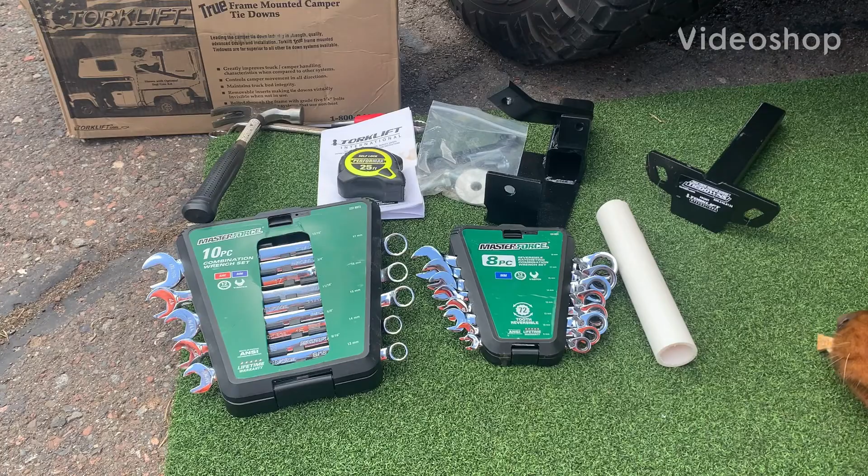All right, everyone. Today we are going to show you how to install front Torklift tie downs for a Toyota Tundra. I'm going to walk you through it step by step and do the best to show you exactly what needs to be done.

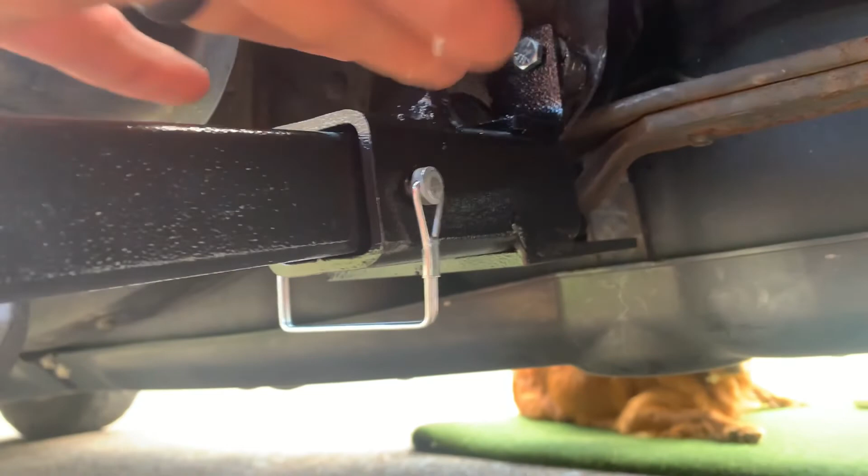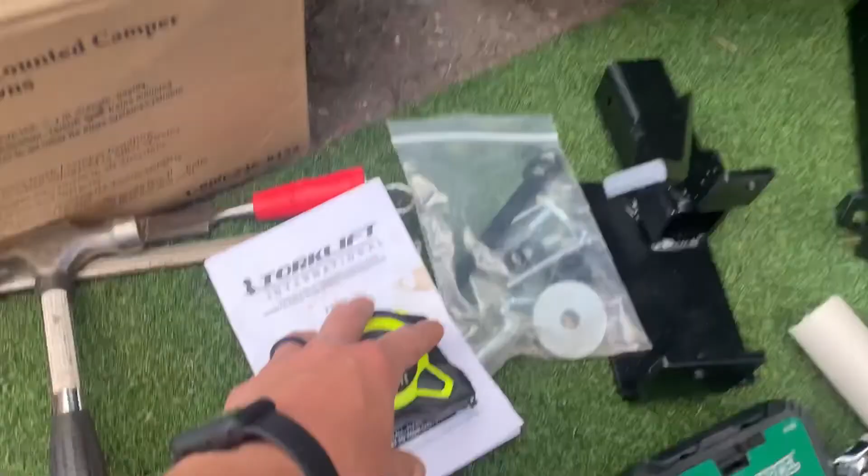I already did it on this side here, and as you can see, what I'm going to show you is how to actually bolt it all in and everything. It can be frustrating, and if you're like me looking at the instructions, the timestamp photos are like from 2008, so I figured if I can figure this out, maybe I'll show everybody to save some headaches. So bear with me, we'll take you through step by step and get this job done.

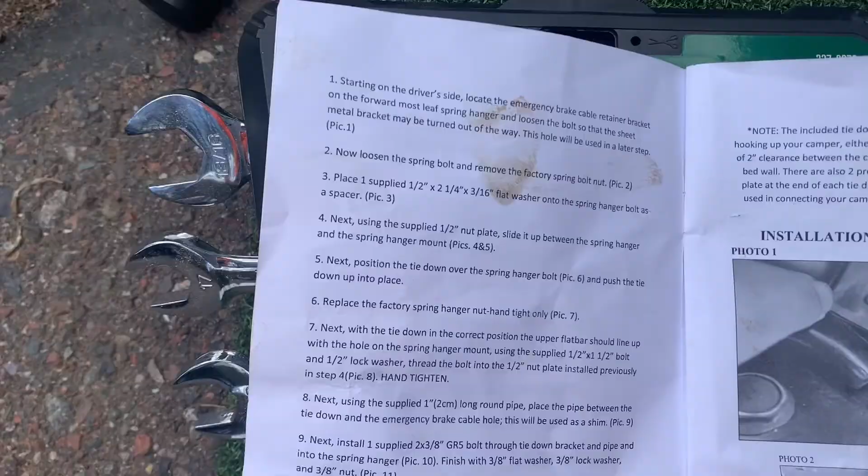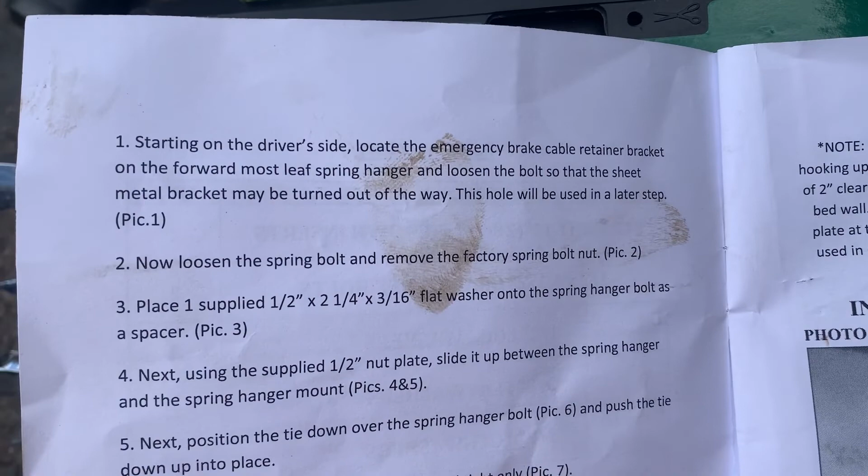I already did the driver's side one, and I will show you the emergency brake cable retainer, but on the passenger side we do not have one of those, so we can just move right to step 2.

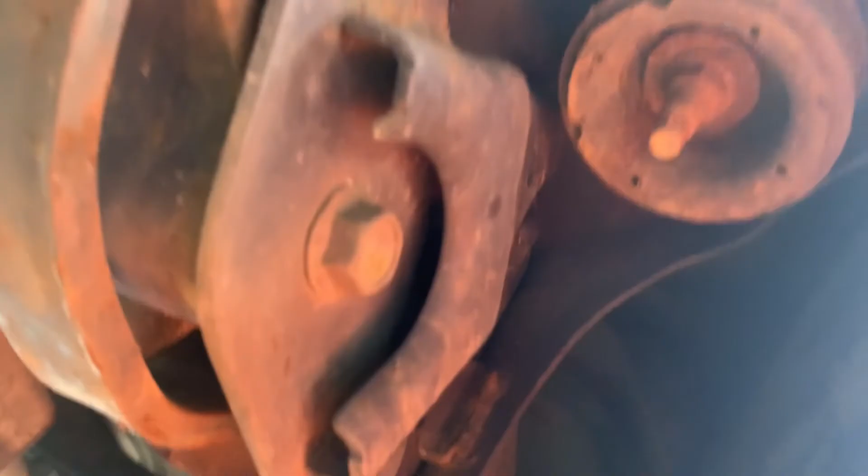Step 2 is now loosen the spring bolt and remove the factory spring bolt nut. If you're looking under your truck, here are the spring leaves, and the bolt they're trying to tell you to loosen is over on this side. This piece right here, they just want us to screw it off and undo it. I believe it's a 19 millimeter bolt, so we'll get that squared away and start loosening it.

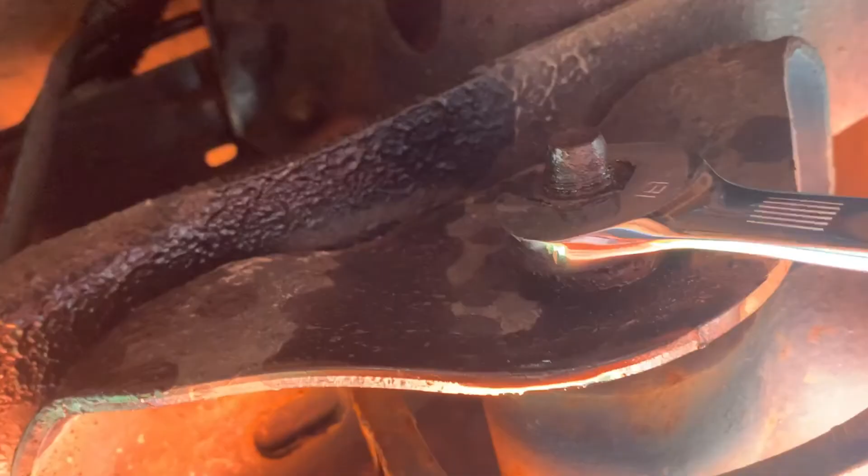I did end up having to spray this bolt with some WD-40 to get it off, or at least get it cracked, because it was rusted on there pretty good, and I did have to add a longer shaft just to get a little bit more torque on this thing.

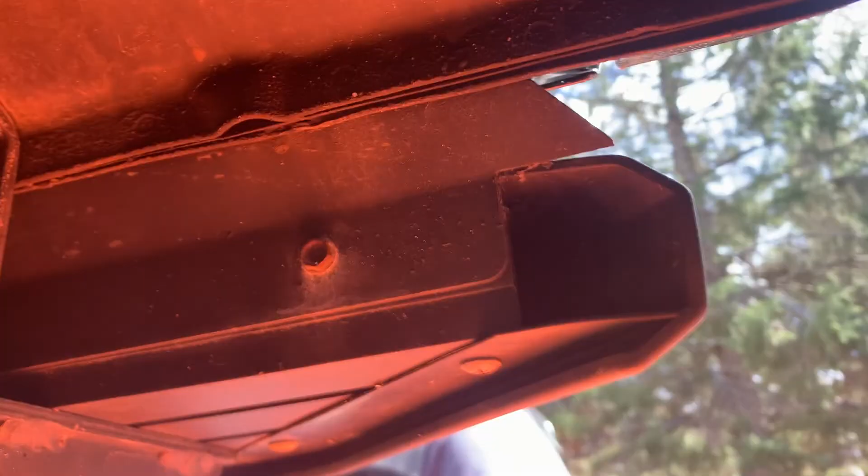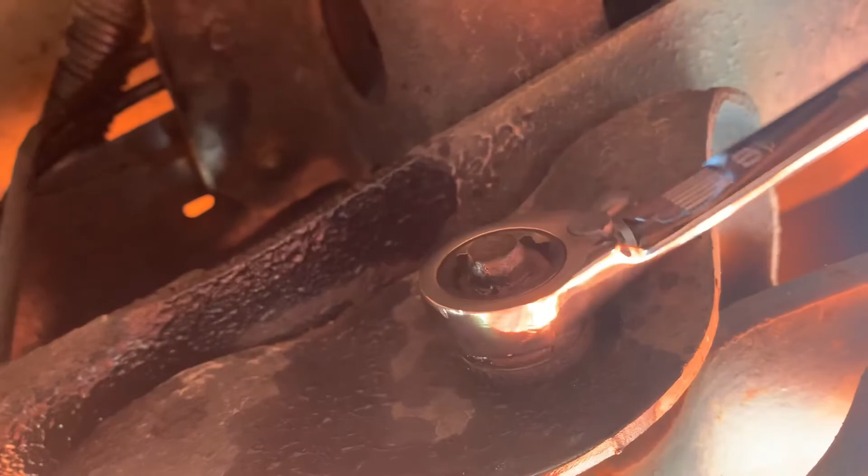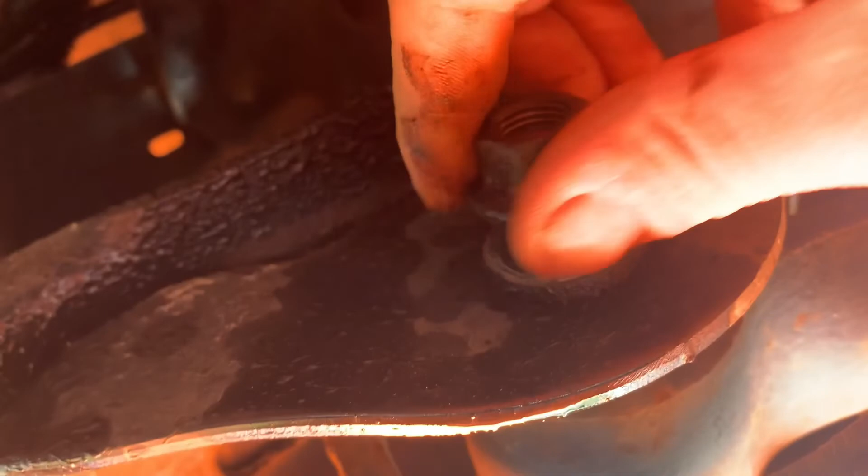If you can find yourself a good deal on some of these ratcheting wrenches, man, are they a lifesaver. So we're gonna take this off completely. Still a little too tight here. You might be able to fit a 18 millimeter socket wrench up here, but I just went with the hand wrenches. So take this bolt off, and then I also took the washer off, so you should be looking like that now.

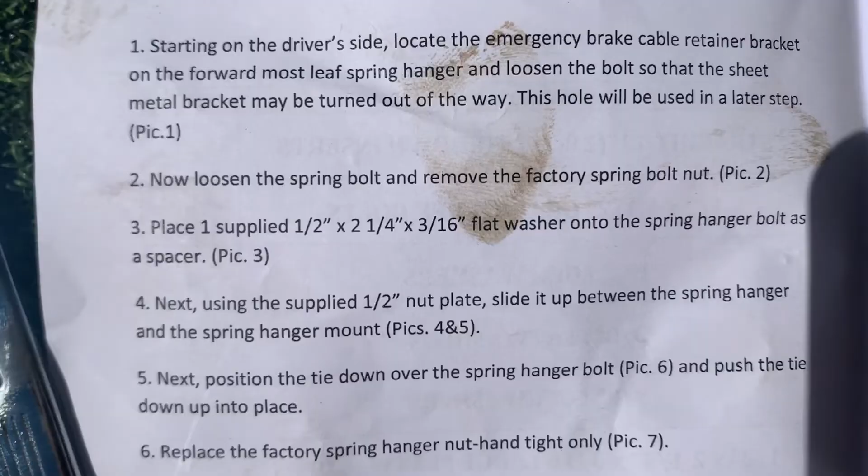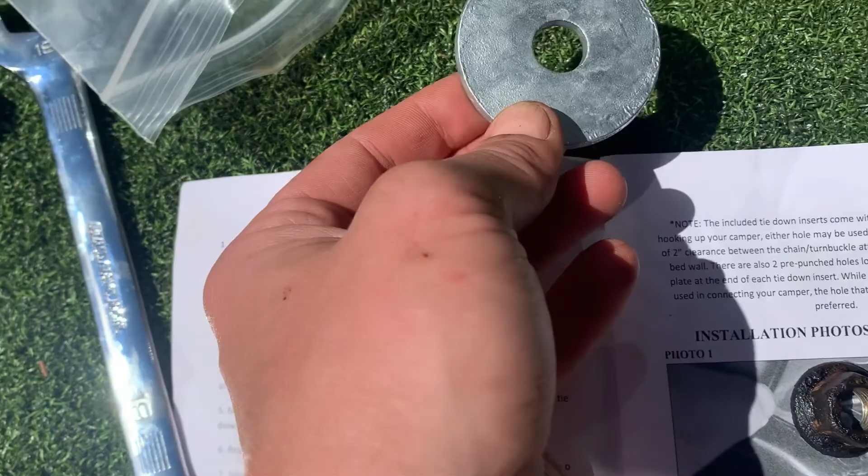Next, number 3, place one supplied half inch by two and a quarter by three sixteenths flat washer onto the spring hanger bolt as a spacer. So that is this guy right there, the big one. And you just take this guy, put it right back there.

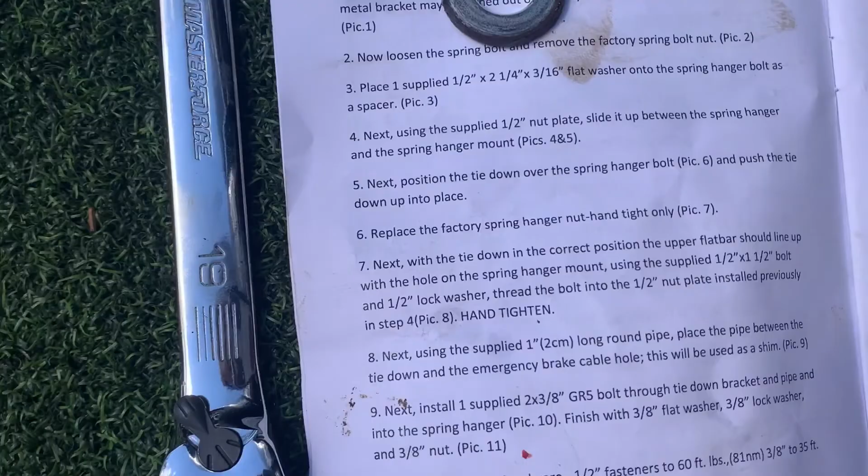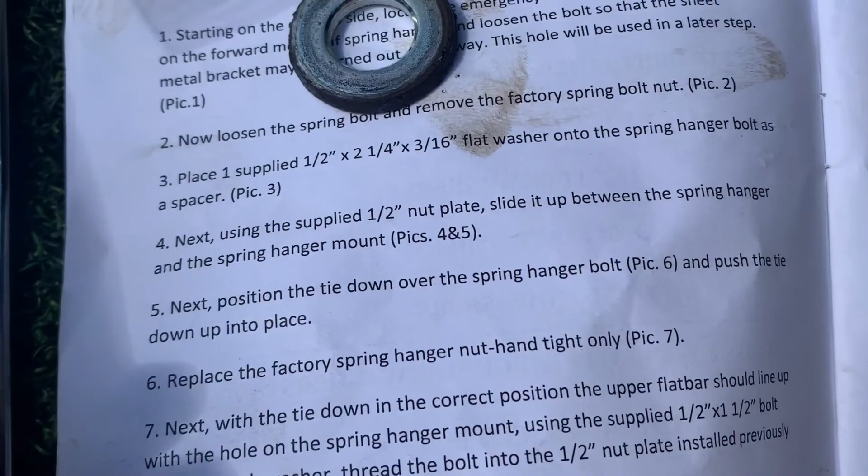Okay, number 4, this step is kind of weird. It says next, using the supplied half inch nut plate, slide it up between the spring hanger and the spring hanger mount. That's this piece right here that they're referring to. I actually found it easier to do it a little bit later, but looking at your truck, the front side here on the driver's side, eventually what we'll do is slide it right through there and bolt it right up where you see the threads right there. But right now it just says to slide it and leave it there. I'm like, not much of a point, so I'll show you what I end up doing once we get to that step.

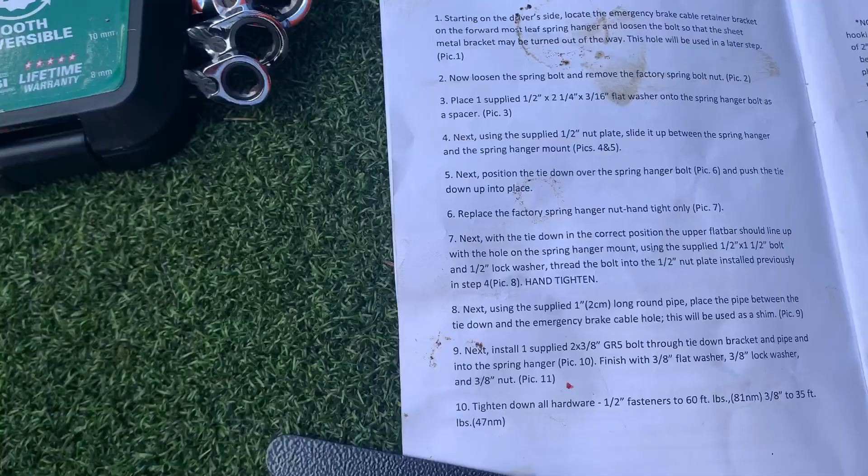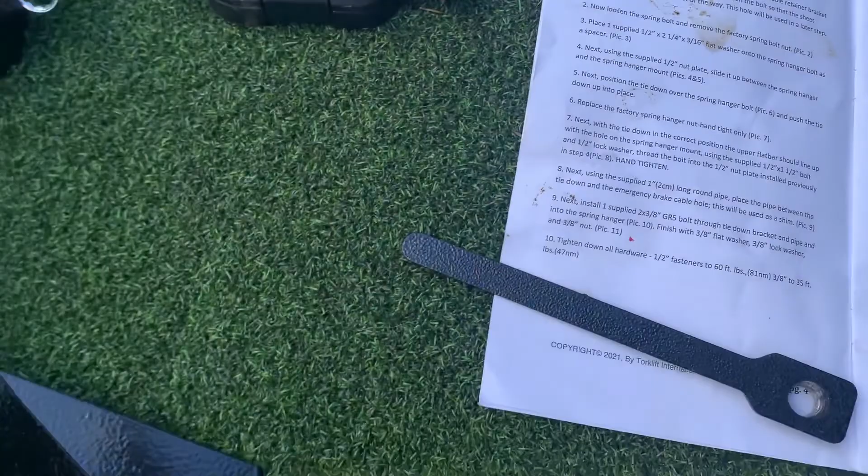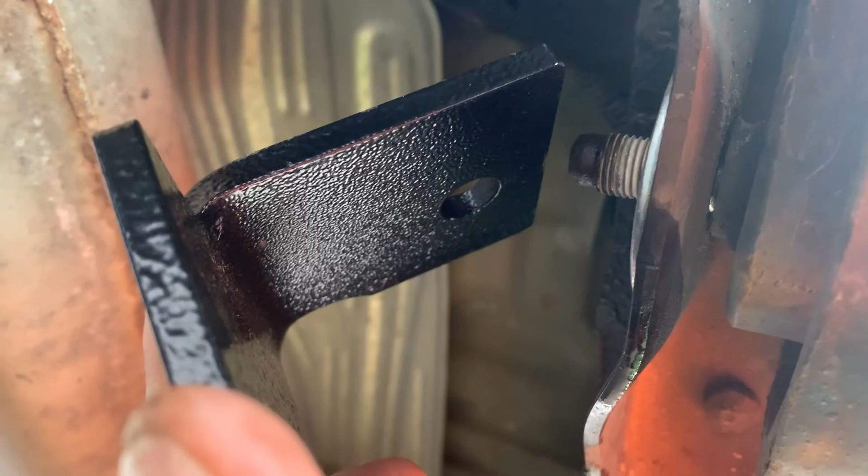Step number 5. Next, position the tie down over the spring hanger bolt and push the tie down up into place. So this is where we actually take the tie down bracket, meat and potatoes, and what we're going to do is slide this up like that. I don't know if I can do this one hand, but essentially I'm gonna have that hole go onto that bolt, and then I'm going to push this up all the way so it's flat and flush.

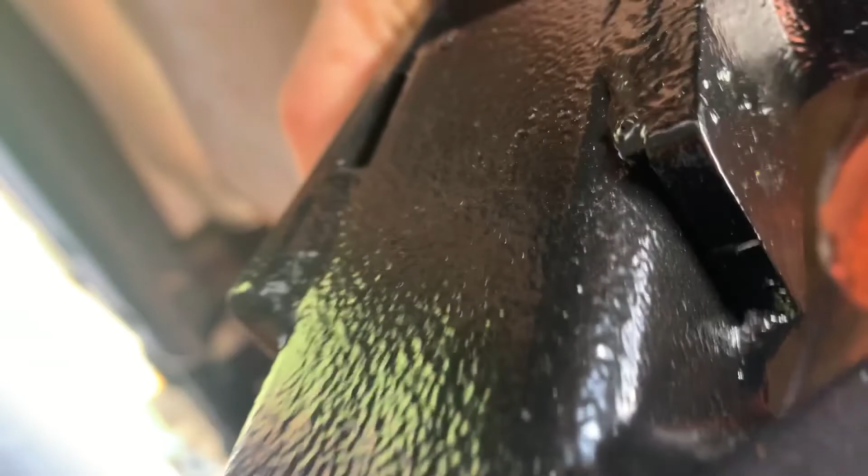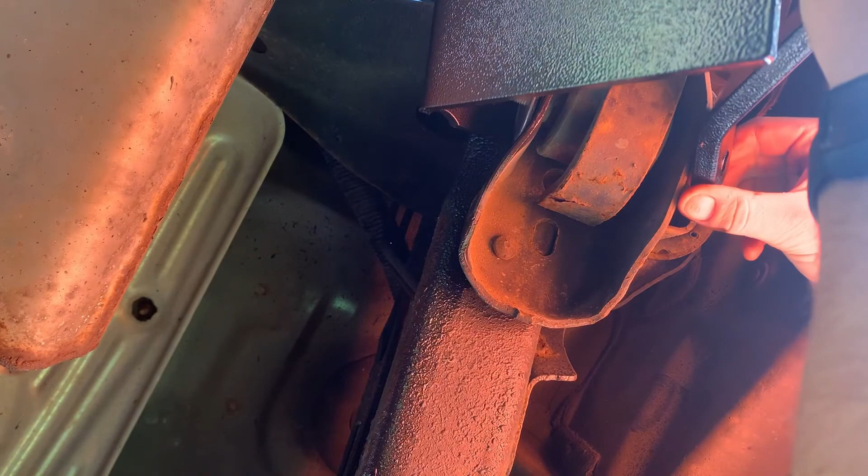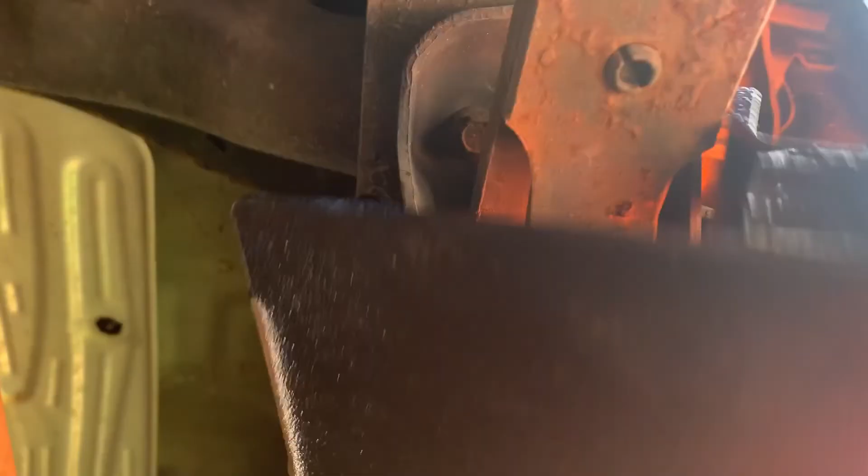Let's give it one shot with my one hand here. You are gonna have to use some pretty good force. All right, let me just set you guys down here real quick. We're able to see that, but push it with pretty good force, and then just kind of push it up there. And now that's right on the thread there, and the bracket is now flat and flush, lined up with those two holes.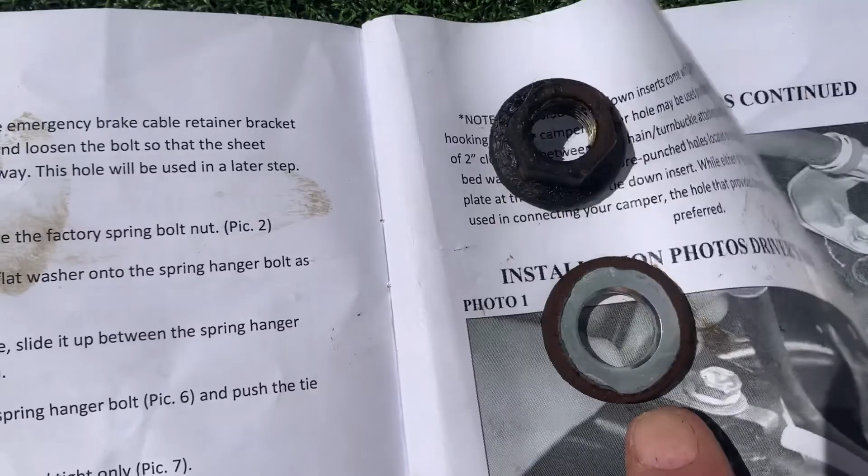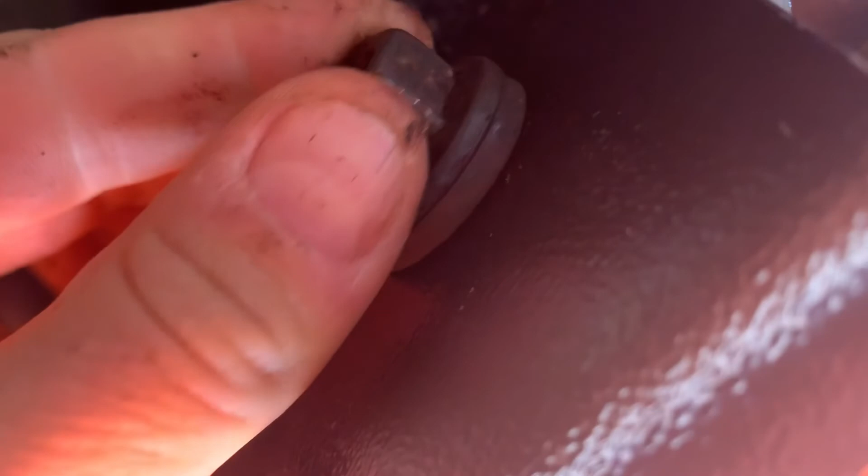Number 6, replace the factory spring hanger nut, hand tight only. So the ones we just took off, we will screw back on to the thread right here. So again, I'm gonna put the washer on, and then just for now, hand tighten the bolt, and eventually I will get that tightened completely.

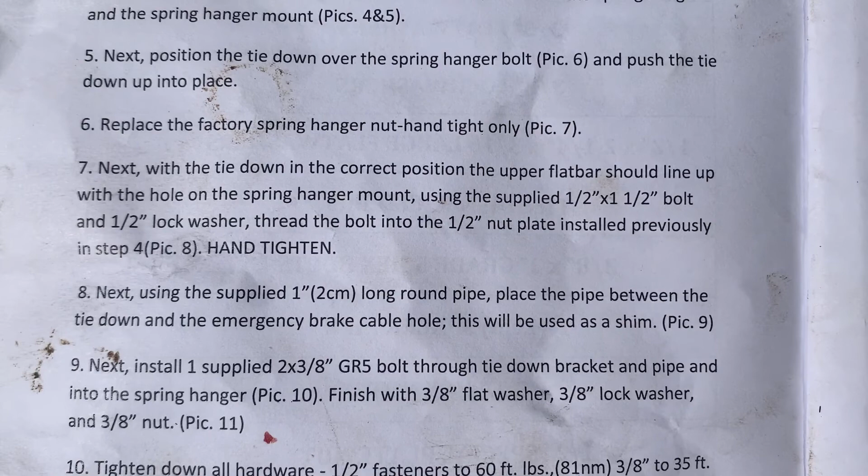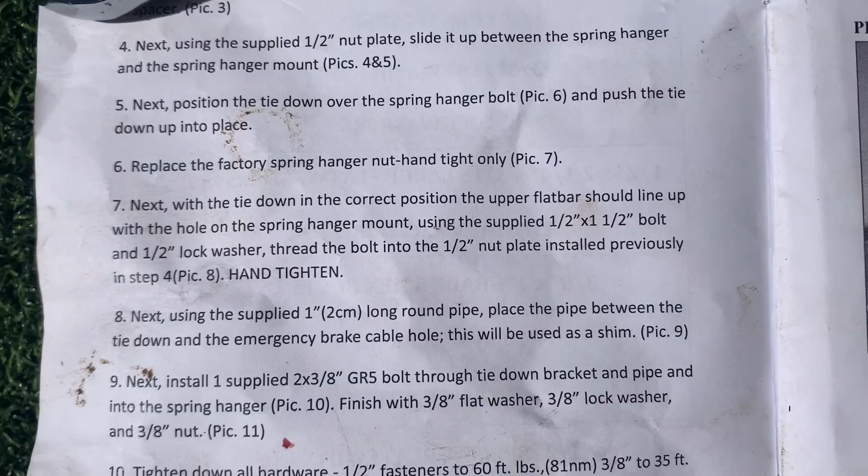All right, step 7, and kind of the trickier step. Next, with the tie down in the correct position, the upper flat bar should be lined up with the hole in the spring hanger mount. Using the supplied 1/2 inch by 1 1/2 inch bolt and 1/2 inch lock washer, thread the bolt into the 1/2 inch nut.

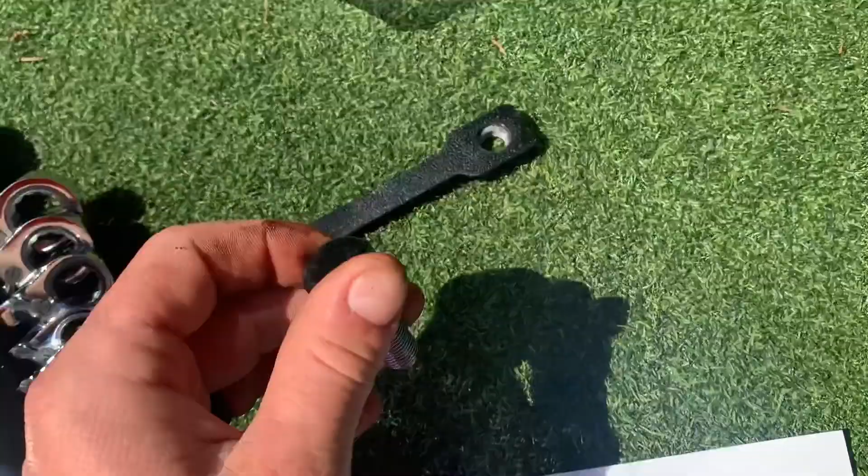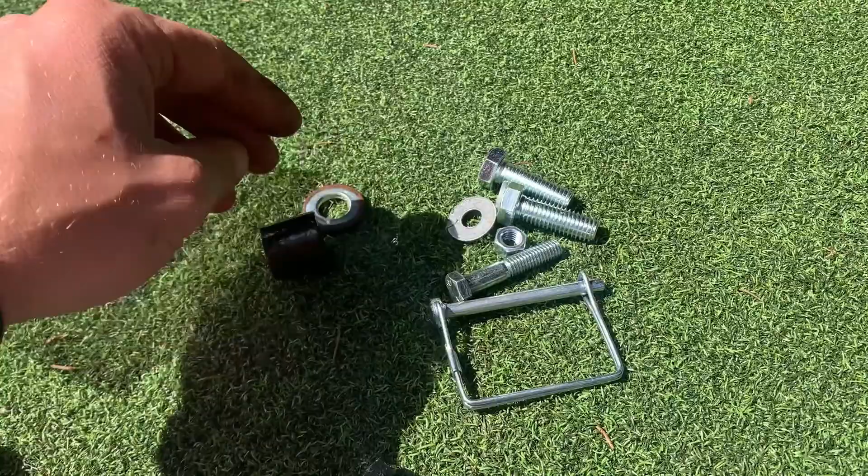So essentially, now we need to go back to this piece that we did not keep up in there. And then they also want us to use this bolt right there, okay, and a lock washer. And if we can find it - oh, that's right. So we just need these two pieces, because then once we get this lined up, this bolt will thread into there.

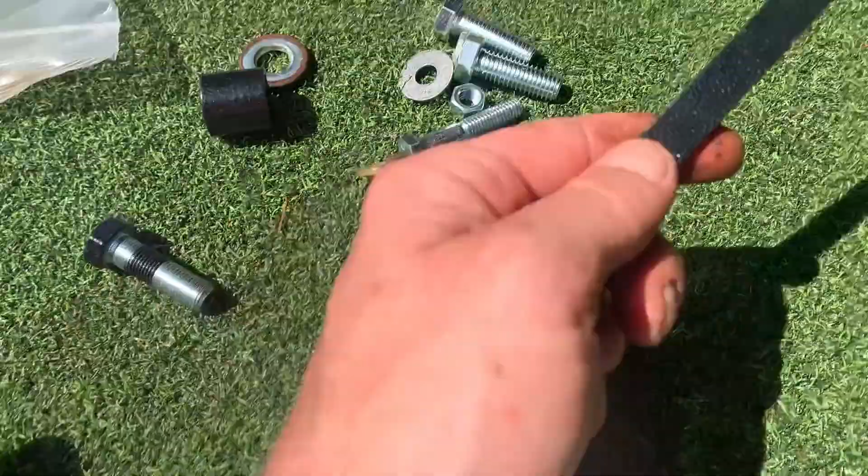Okay, so it's gonna be tough for me to videotape this one, but again, you want this facing you on the outside, okay, like this. And what you'll do is you're just going to thread it under, just like so, and then you need to use your other hand to line the bolt and thread it through there. Okay, I'll show you the finished product once it's done.

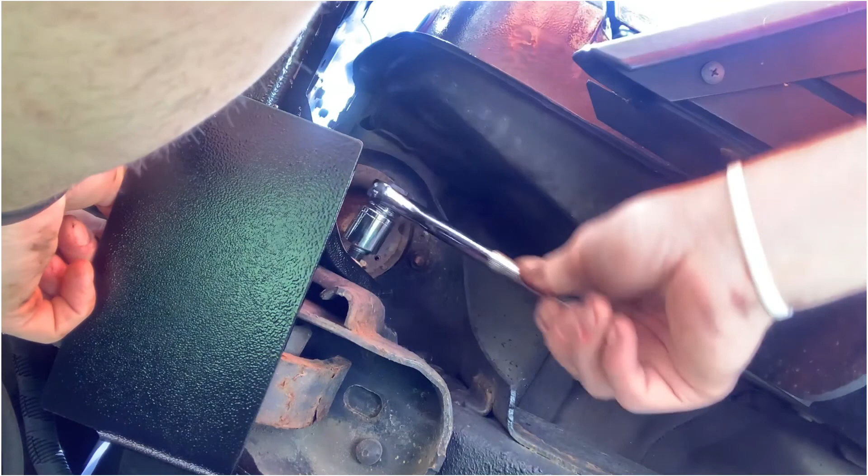Okay, so there it is. Kind of have to line the bolt up with the screw there, and honestly, that's the most annoying part, is trying to find the thread in a very narrow spot. So good luck with that.

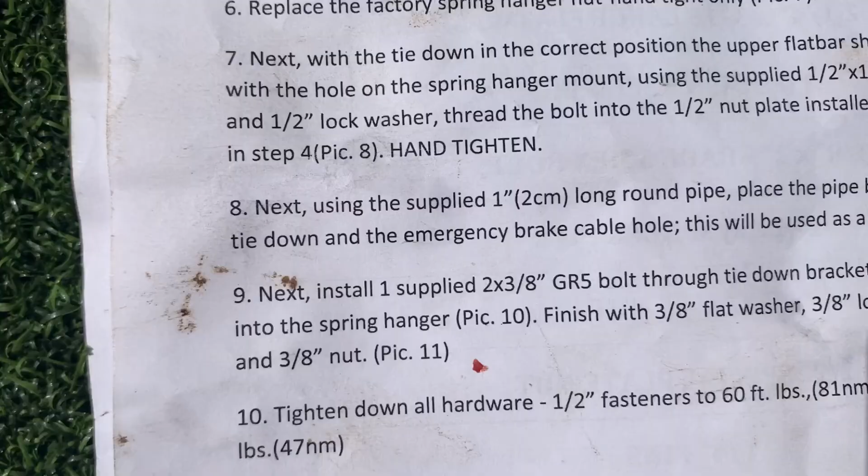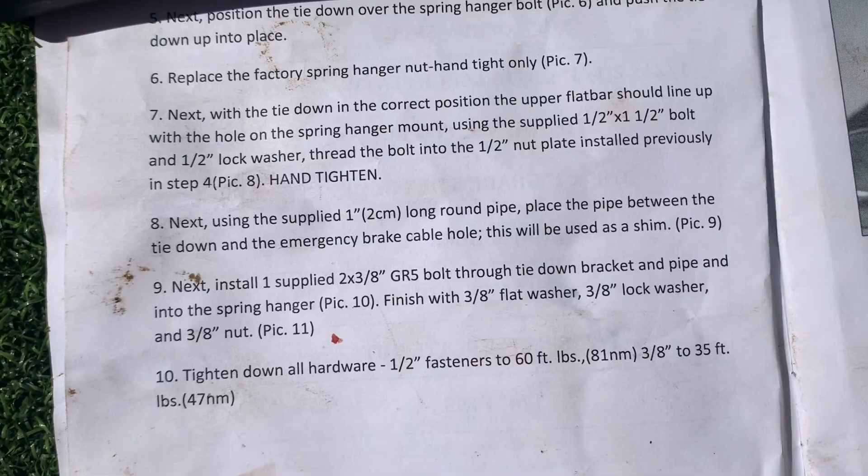Okay, step number 8. Next, using the supplied 1-inch long round pipe, which is this guy right there, place it in between the tie down and the emergency brake cable hole. Now, this is the side that does not have the emergency brake cable hole.

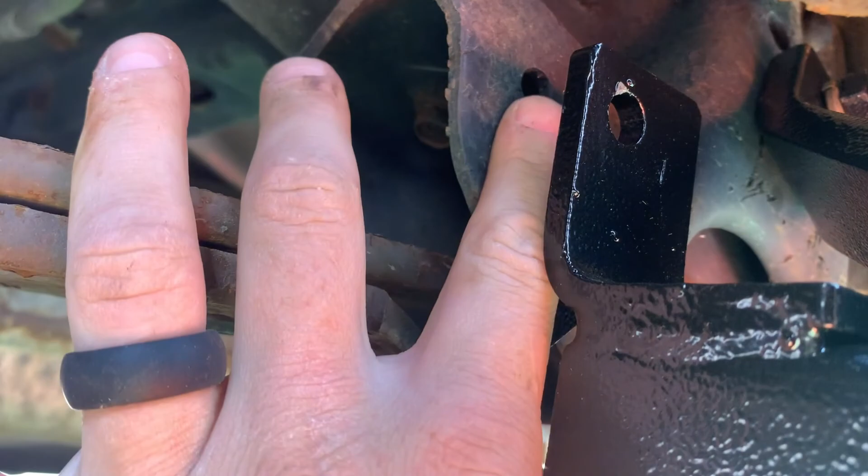What you will need to do if you're working on the driver's side is there will be a bolt which you do not need to move. There's a bolt that you do not need to move, and then there's just a little metal flap that you need to just take like a pliers and flip it up. So do not do anything with the bolt that's attached to the cable, to the brake cable. Simply just move the flap up, so then there's an opening clearance.

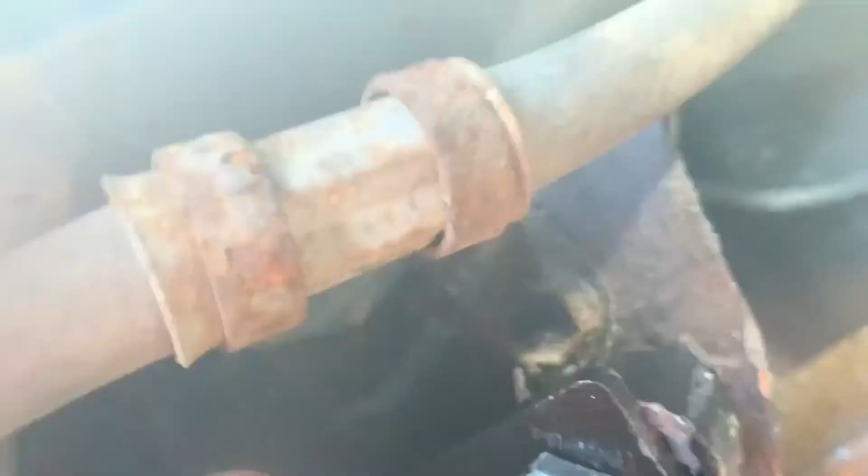Here I walked over to the other side. So there's the bolt, and here's the emergency brake cable, but there's the bolt that you do not need to touch, and then under it there'll be a little flap that you need to move. So just don't touch that bolt, just move the flap. Okay, so back to the other side.

So you're taking your spacer and you are simply wedging in there. Okay, this one would fit pretty easily. The one on my other side did not, so I had to hammer in a little bit.

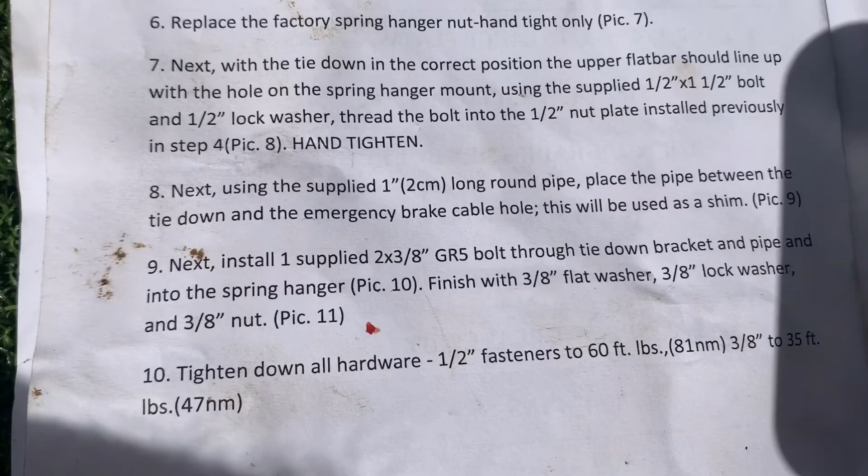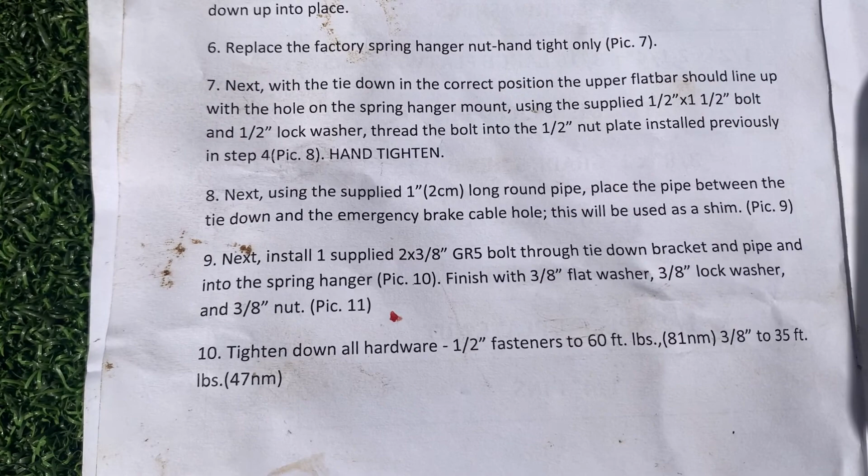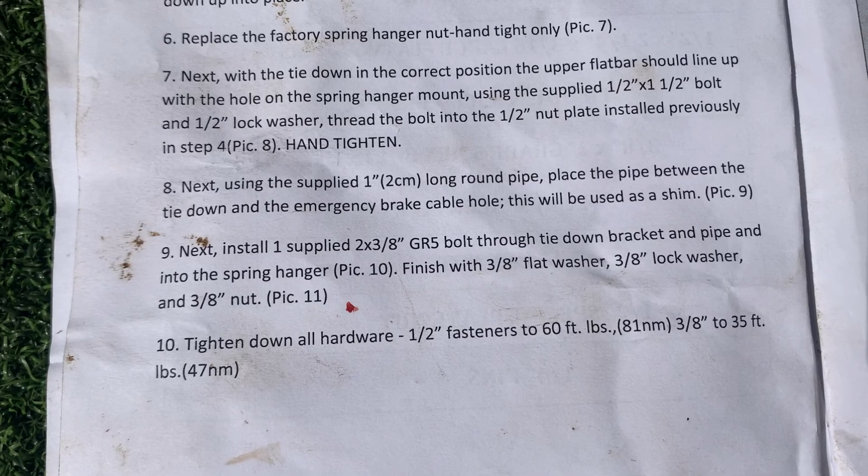Okay, number 9. Next, install one supplied 3/8 bolt, which is this guy, through the tie-down bracket and pipe and into the spring hanger. Finish with a 3/8 flat washer, which is that guy, and a 3/8 lock washer, which is that guy, and a 3/8 nut, which is that guy.

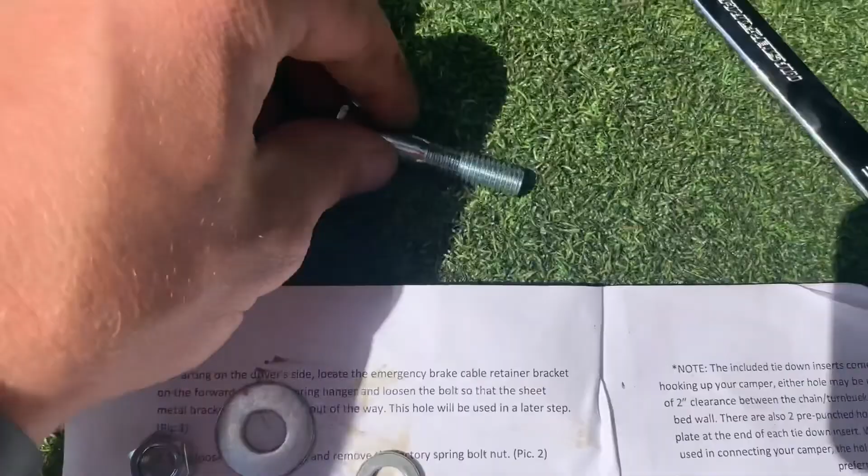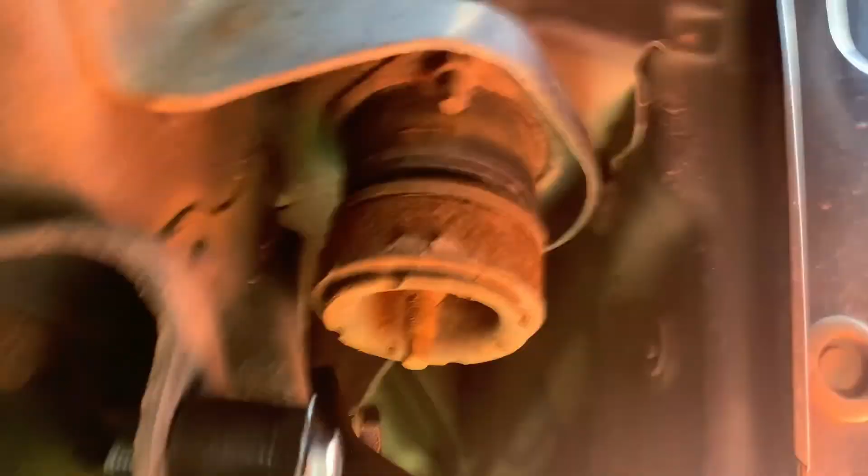So take your bolt and put it through, so I can get a better angle. So again, you're taking your bolt, putting it through as far as you can, so it's right there.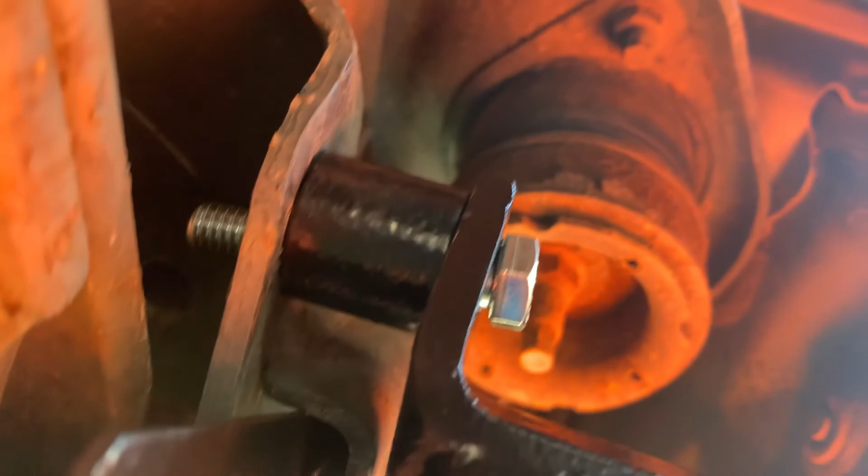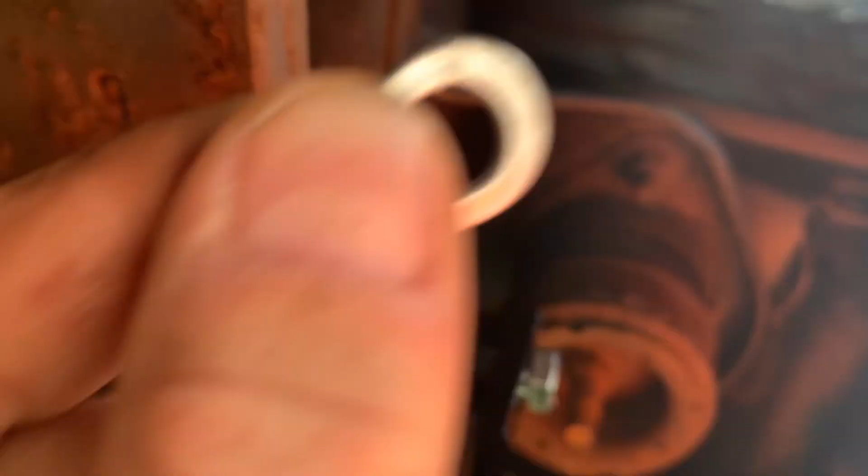Okay, then you're going to take the other 3 items. First one will be the washer. The lock washer - get that on with one hand here, come on. Okay, and then your 3/8 nut will go right there as well. You will need, I think, a 14mm socket or wrench, 2 of them, to tighten these things.

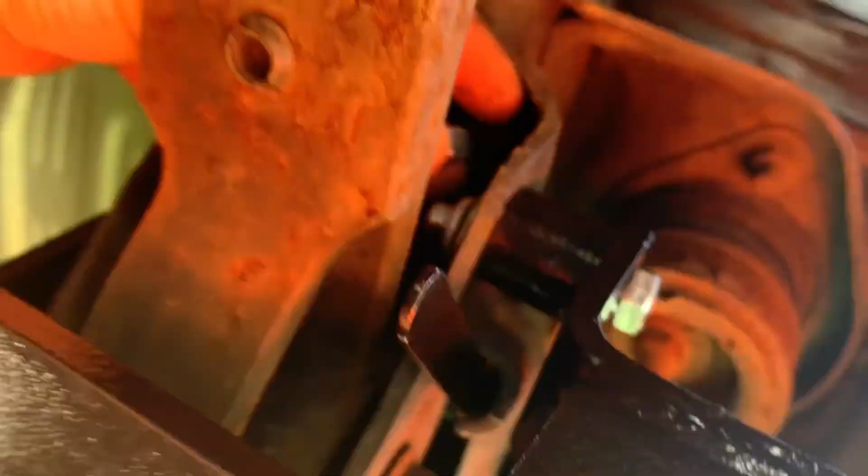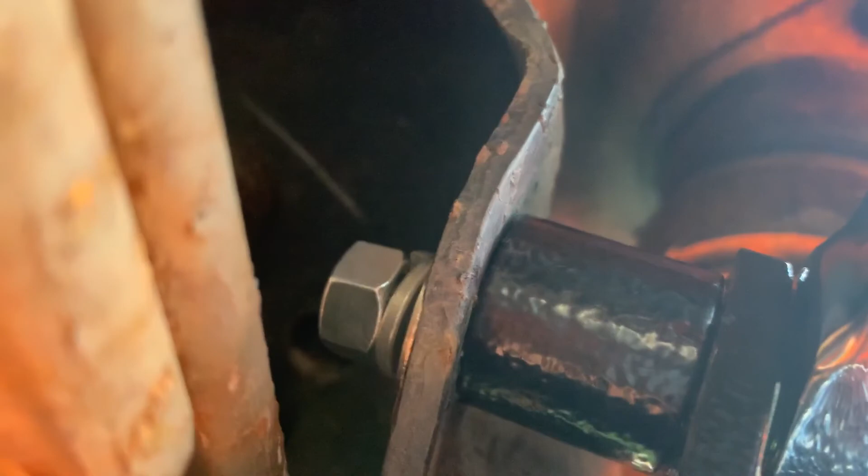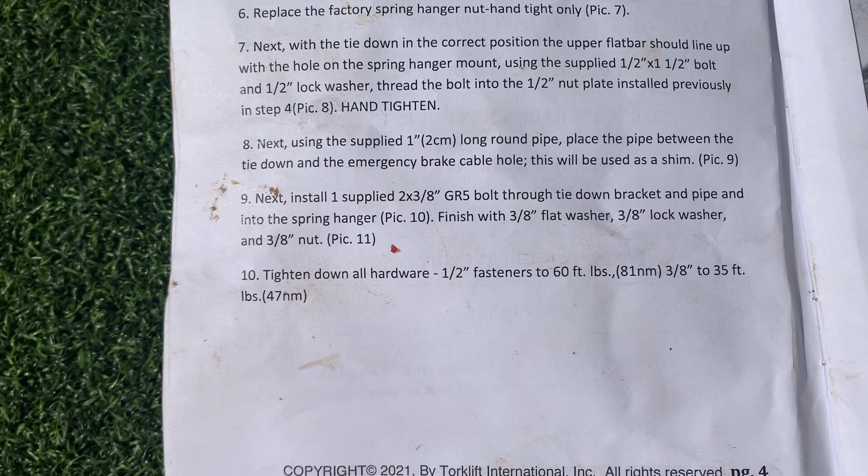Okay, I can't do this with 2 hands or with only 1 hand, so I'm just putting one here. I'm gonna put another wrench over there, and just cross tighten them. And then step number 10, tighten down all the hardware, 1/2-inch fasteners to 60 foot-pounds, 3/8-inch to 35 foot-pounds. Okay, so AKA just tighten them until they can't tighten them anymore.

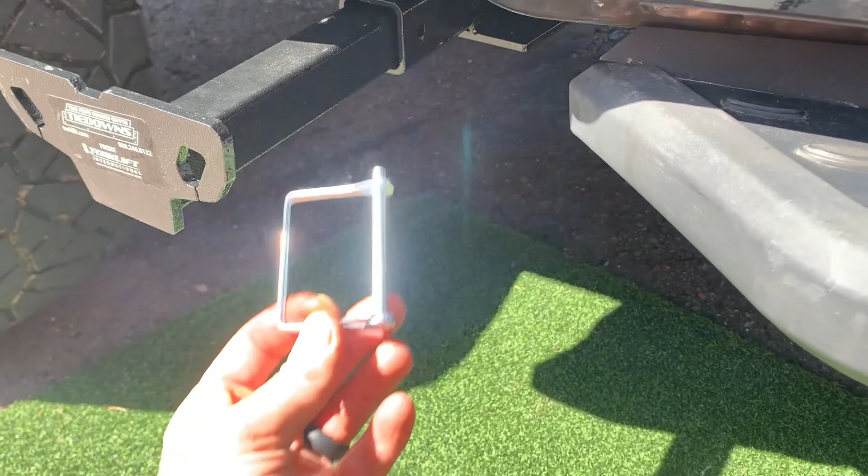And then, obviously, the actual tie-down part, when you're ready to hook your truck camper up, or maybe something else, just put it right in there, and you can insert your clip right through that center hole, and you're good to go. Yeah, honestly, the driver's side was more of a pain in the neck than this side was, maybe just because the second time I knew what I was doing, but it should be ready to go.